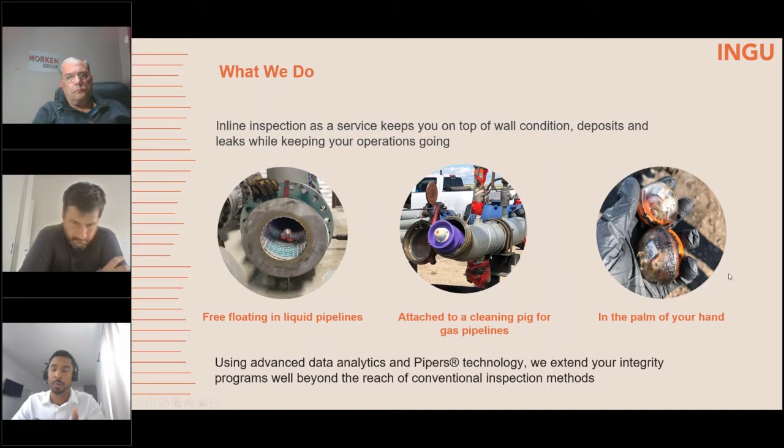And so again, this is something that is meant to extend integrity programs, and we're priced so that you'd be able to run more lines on a more consistent basis. Normally, we offer a self-serve model, and we would ship directly to operators. In the regions that Morken covers, we would work through them. We would be able to just ship the pipers directly to them, they would handle the launch and receive and get the data back to us. But we don't ever go out into the field, and this is for operational pipelines, so you don't have to shut down production to be able to use the device.

And we've run pipelines as small as 2 inches in diameter up to 48 inches, and all types of materials from steel, flexsteel, HDPE, fiberspar, ductile iron. We work in not only oil and gas, but also water supply. We've done mining applications. So really universal pipeline access. These are one-time use devices.

And so it allows us to screen just about any type of fluid: crude oil, emulsion, gas, produced water. They could just as easily flow down a slurry, fresh water, wastewater. We're in the process of getting certified for drinking water as well.

Again, these are multi-sensor devices. The business model is we allow operators to choose what information they want, but every single run, we're still measuring the acoustics to detect leaks. Pressure is how we would detect scale or any deposits in the line, and can also give a pressure profile. The magnetometer would give an idea of wall condition, and then there's an IMU on board as well, and we'd be able to map out a pipeline in the right of way when attached to a cleaning pig.

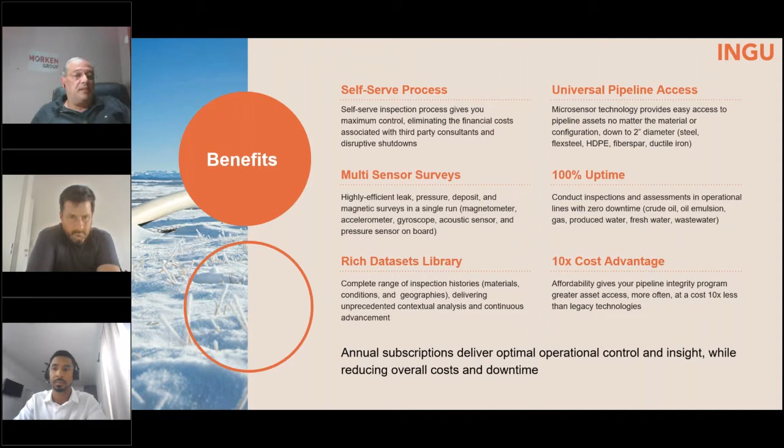Go ahead, please. Okay, and so I want to talk about the safety and performance of the Pipers.

The Pipers are CSA certified for hazardous environments and operational conditions. They're intrinsically safe, so if they were to come apart in your pipeline, they are safe for the contents of the line. And we have 3 different models.

The first being the Pipers 2.8, which is the latest version. These were developed specifically for high pressure environments, such as offshore, and are designed for pipelines 4 inches in diameter and larger. They have a pressure rating up to 2,900 PSI and a temperature range of -20 degrees to 60 degrees Celsius, and a runtime of 24 hours.

And so just want to clarify on that - it does not mean that they have to be collected in 24 hours. They're able to run for 24 hours, and then the data is stored on the device, and they can be retrieved at a later date, and then the information can be taken off of the Piper from there.

The Pipers 2.2 have a lower pressure rating of 1450. These are for pipelines 3 inches in diameter and larger. And for even the smallest pipelines that are 2 inches in diameter, the Pipers 1.5. Again, these have a much lower pressure rating and a shorter runtime, but these lines are typically much shorter, so it's not much of an issue.

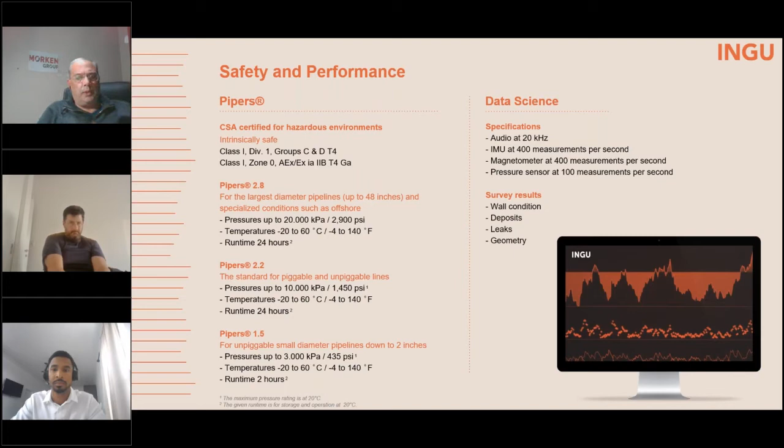Go ahead, please. Okay, we'll jump into some of the data and customer applications. The first is really straightforward, and that's leak detection.

As the pipers travel through the pipeline in a free-floating deployment, they are suspended in the liquid, and it's very quiet. This shows the frequency in hertz from a reference section further along in the line, with time shown on the x-axis. It's very, very quiet, and then when you approach a leak, it starts to get noisy, and as you pass it, it becomes quiet again.

This was a Canadian operator that suspected a leak and requested a leak detection survey. We were able to pinpoint the exact location, and they followed up with a verification dig and were able to find it exactly where we told them it would be. There was corrosion that led to the leak, and with it being under a road, you always want to be spot on. This is just one example of leak detection, which we're very confident in our ability to detect using acoustics.

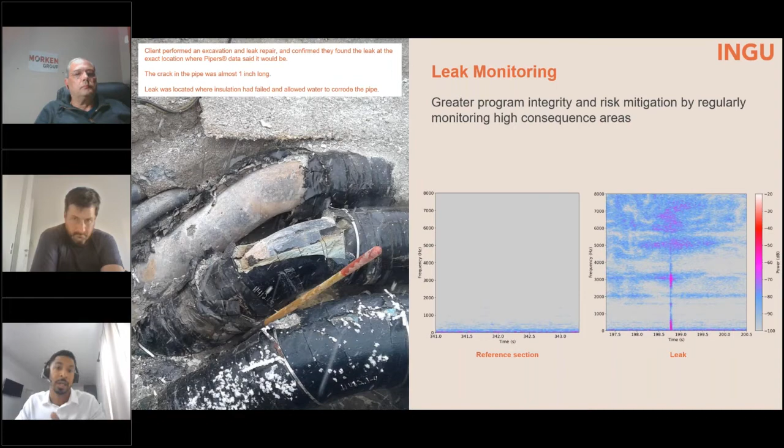With deposits, this uses the pressure sensor on board, measuring 100 pressure measurements per second. With that, we have the profile, and we're also analyzing the elevation profile and correcting for hydrostatic pressure, also factoring in the roughness of the pipeline and the diameter. We're able to get a frictional pressure loss as a function of distance, to identify areas where there are deposits and scale in the line, where an operator might want to follow up with additional cleaning.

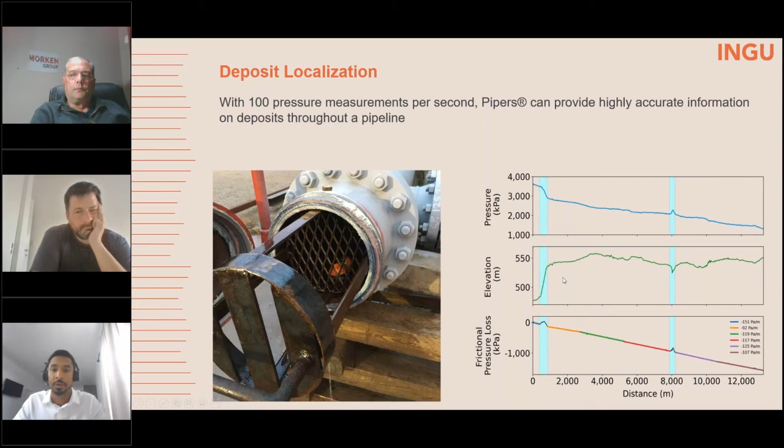This goes hand in hand with another application of the pipers, in which they are attached to the back of a cleaning pig, showing the friction as the cleaning pig runs through the line. You're able to see the effectiveness of the cleaning. The areas in red are areas of friction, and this is the first run.

We'll do 2 runs with each deployment. On the very first run, there are several areas of friction, but as the pipers run again with the cleaning pig on the second pass, you can see that most of that has been eliminated, with only 2 main sections remaining with high friction. We're able to pinpoint for that operator where they would follow up with additional cleaning, since this is somebody who runs cleaning pigs on a consistent basis but still suspected deposits in the line.

And so this is one application that we'd be able to use to help make sure that this is as efficient as possible. I don't know if there should be any translation of the applications. I can go back to any slides. Yeah, that's good.

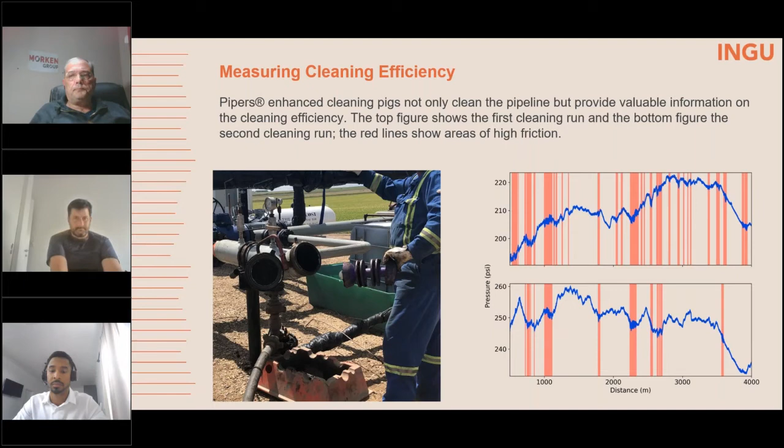Go ahead, please. Okay, one of the applications that I get asked the most questions about.

This will be tough to cover in 2 minutes, but we'll try. With the magnetic survey, the Pipers are not a high resolution tool like an MFL tool. Being a low resolution tool, what we do very well is have very repeatable data. This can be used multiple times to show change over time at a very high rate. Here you can see 4 different Piper runs, 2 that took place back to back in July last year, and 2 that took place this year in February.

In red, we have the joints, so we're able to locate them on these lines, and in blue is the data. Even without knowing what the squiggly lines mean, you can see this is the same - you can overlay it, it's the exact same outside of these two areas. So we're able to show an operator these are the points that have changed, your wall condition has been affected from July 2020 to February 2021. Oftentimes we're not sure if this is external - if somebody hit it or it's been dented - or if it's internal and it's corrosion, but we're able to pinpoint exactly where an operator would go and say these are the areas you need to investigate. With change over time being something really important to stay on top of, this is where everything comes into play with prevention of leaks and prevention of extended corrosion.

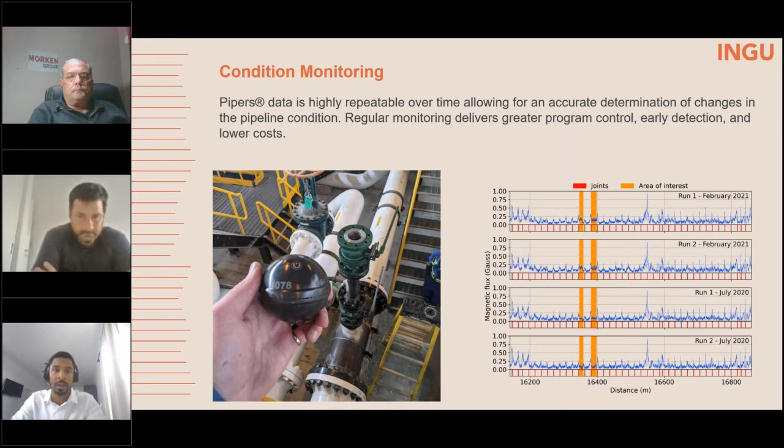Go ahead. The one application that is very practical and goes hand in hand with condition monitoring is for illegal hot tapping.

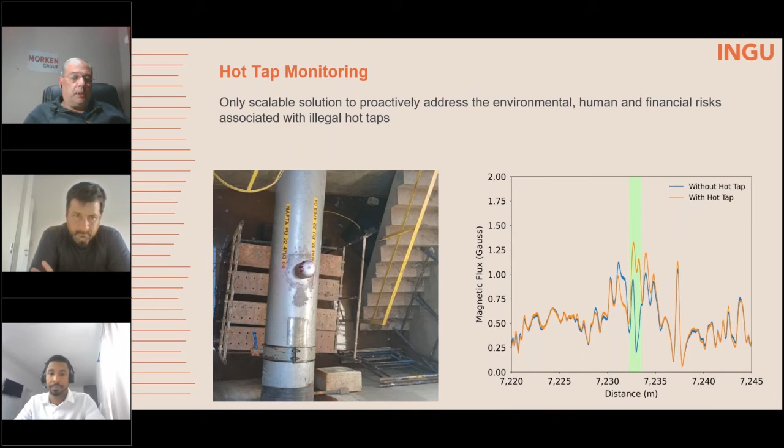And so we're able to give a very good idea of the condition, but again, this is more of a condition monitoring tool. So when used on a consistent basis, that's really the best application, as opposed to a one-off, this is exactly what's happening in the line. We just don't have the same level of resolution because we're not magnetizing the line. And so that doesn't change the line. And that's the reason that we're able to be as repeatable with our data when we do this type of survey.

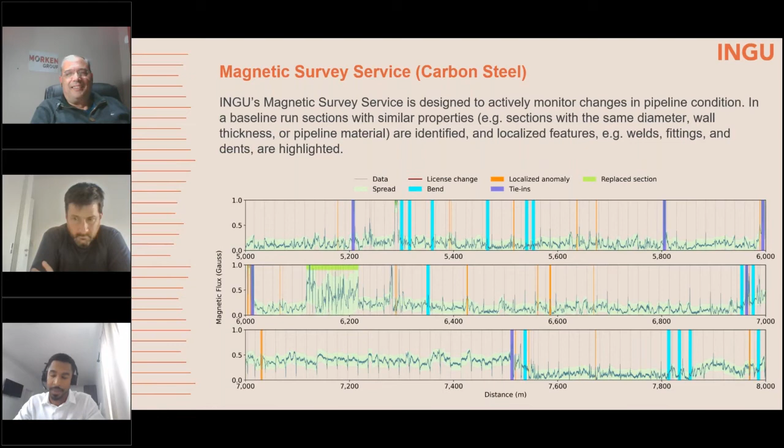Okay, please. Now we have one more minute. Okay. Yep, and I didn't know if you wanted to cover that, but we need to leave time to answer the question.

Okay. Yep, this is really the zoom in of the last page that we were looking at. So we're able to see features that are typically man-made features. We're going to see that those are more symmetrical in nature, as opposed to anomalies or corrosion, which is going to be different shapes. Again, we've run 250 pipelines.

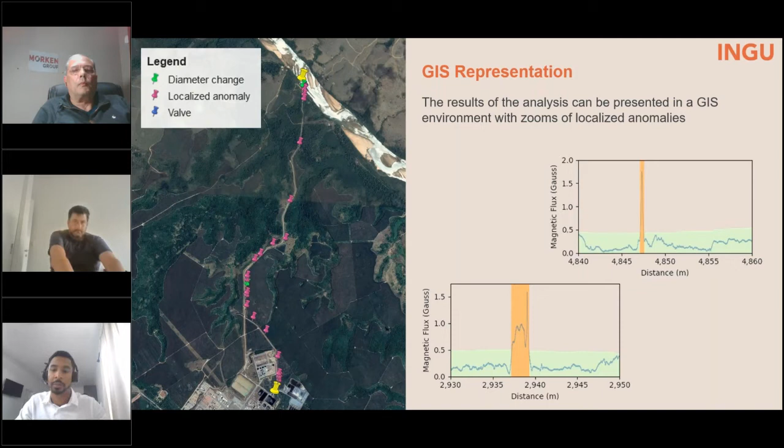Our team has been doing this with commercial lines for the past 3 years. So we're able to draw upon our inspection history to be able to give these answers to operators, and then able to show where all the anomalies lie to assist operators if they want to do verification digs or if they want to follow up with other tools. The last survey that we offer is the geometric survey, and it can give an idea of the right-of-way and any bends in the line, the angles, the directional changes.

And so again, this is when attached to a cleaning pig. But that's really the wide range of surveys that we're able to offer. And again, if we're looking to answer specific questions, we can also do that for operators as well.

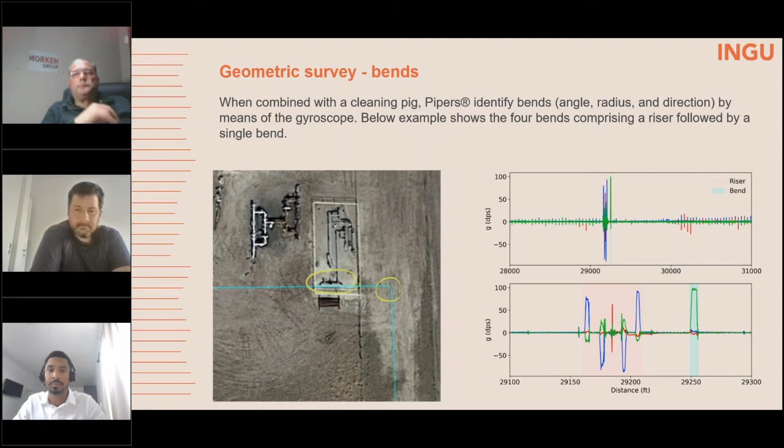Okay. So it's finished for you? That's it. Okay, thank you very much. I know that probably went over time. Thank you Joseph for your help. No, it was very helpful.